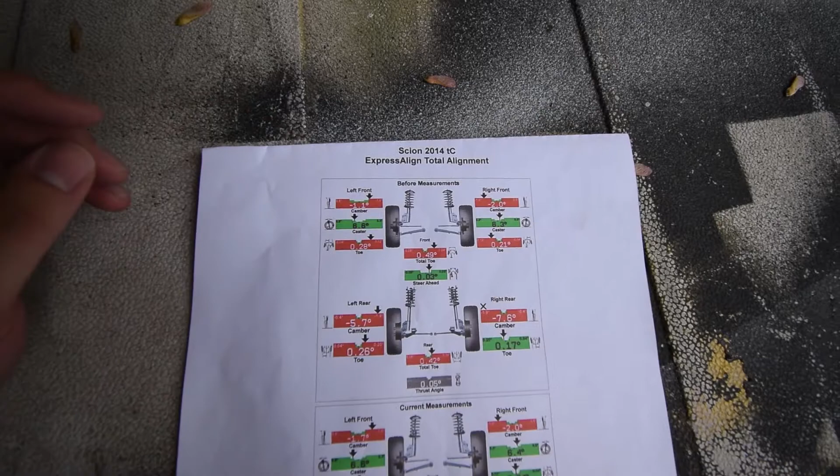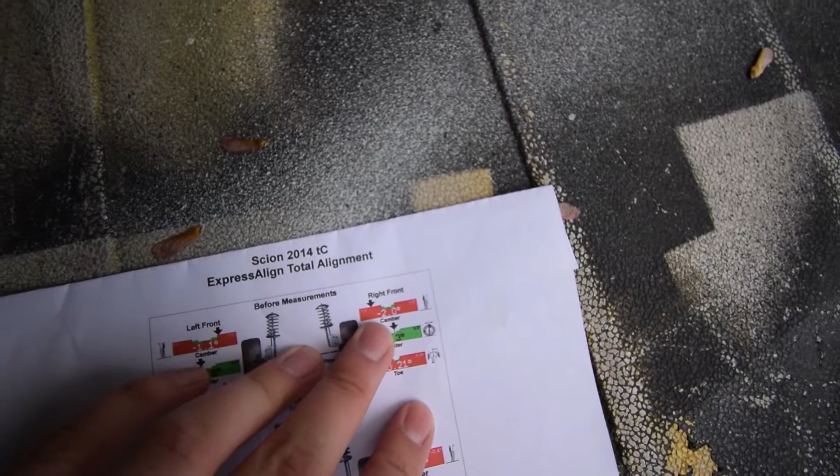So let's flip around to this right here. Those of you who know how to read this, good. I'm just gonna talk about it for those who don't really understand. So in the front, on the driver's side, we had negative 1.1 degrees camber, and on the right side, we had -2. I think the front was higher simply because of the camber bolts. Because I swear that this wheel was straight, not -2. Especially since this one was definitely more cambered in the front, I think putting the camber bolts in there definitely changes it from the -2.

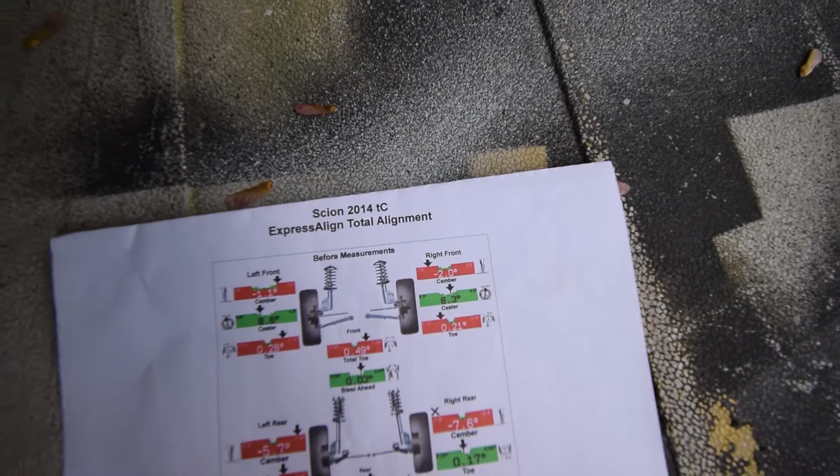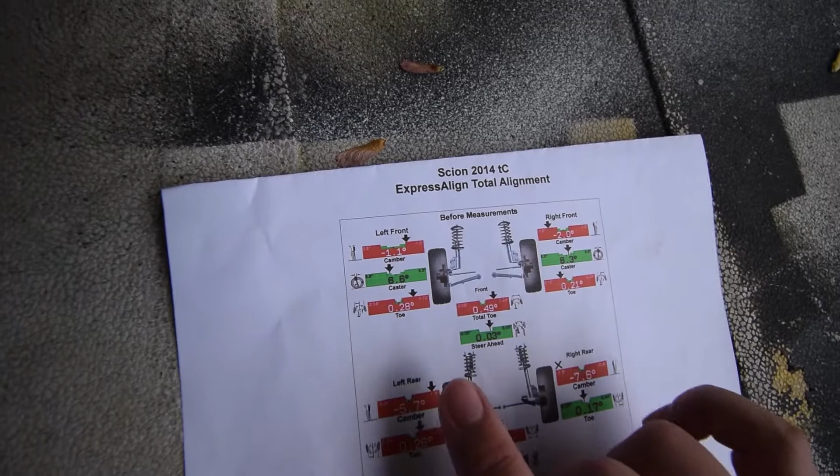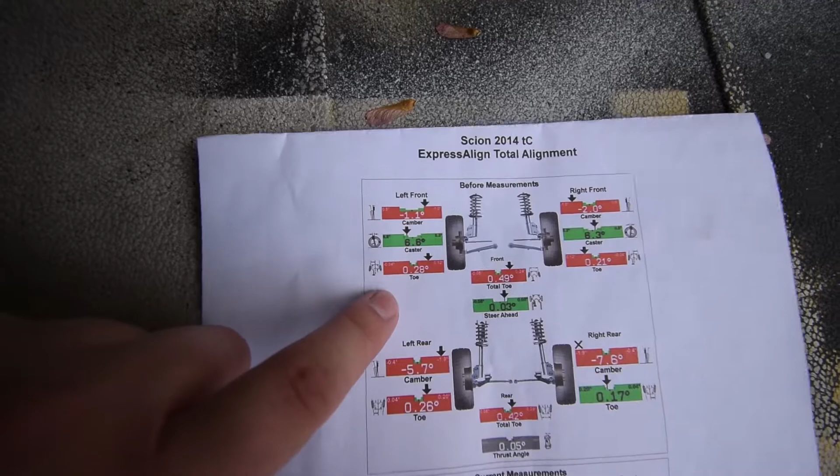So also my toe, I was running about a quarter toe in, right? So I was running a quarter toe in the front. That may have been the reason why I was having so many issues with lower profile tires. Talking with Alex, I actually like the meatiness of the tires up front, so we're probably never going to change that. It's just that might be the reason why I was having so many difficulties up front, because we were running almost a quarter degree in the front.

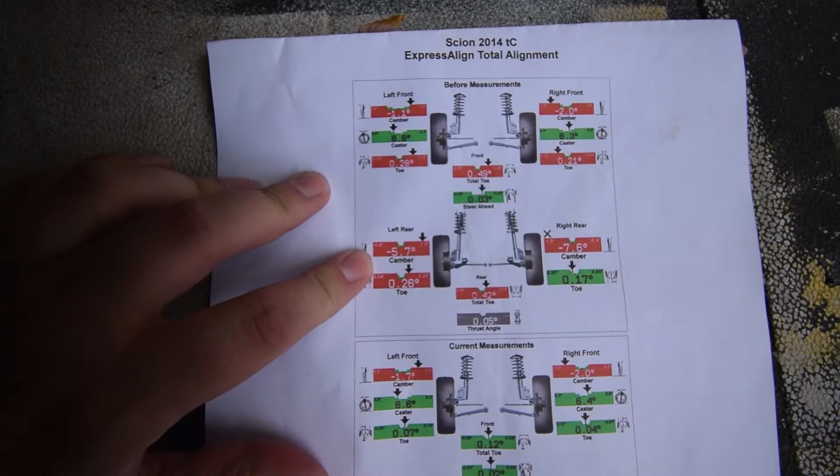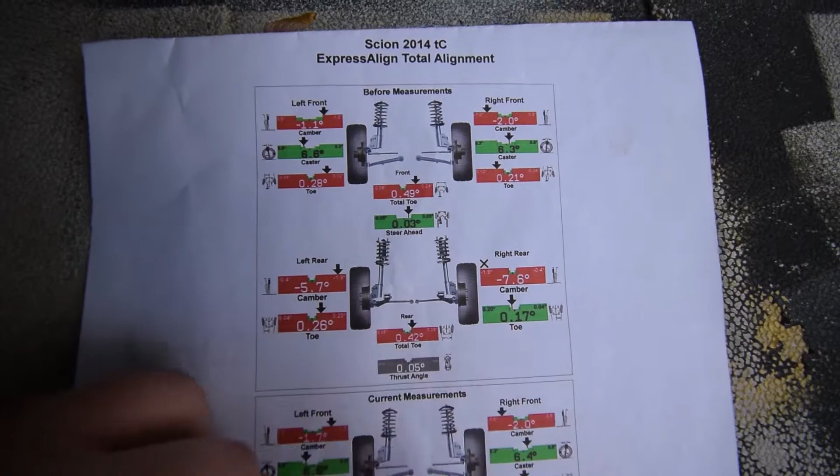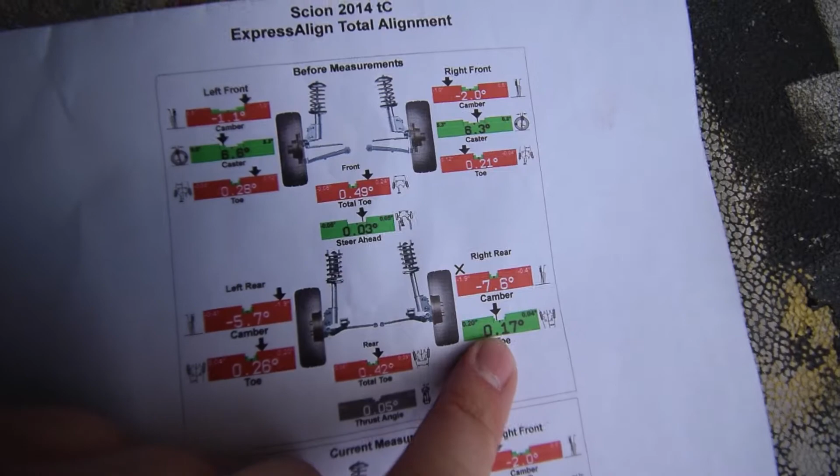So here's where it gets interesting. In the rear, on the driver's side rear, it's negative 5.7 degrees, while on the passenger rear it was negative 7.6 degrees. So we're talking almost 2 degrees off in camber from the driver's side to the passenger side. The passenger side was the only one rubbing. This is the only one that dug into the wheel a little bit, and that could potentially be why I had so many issues with the 30 mil spacer in the rear.

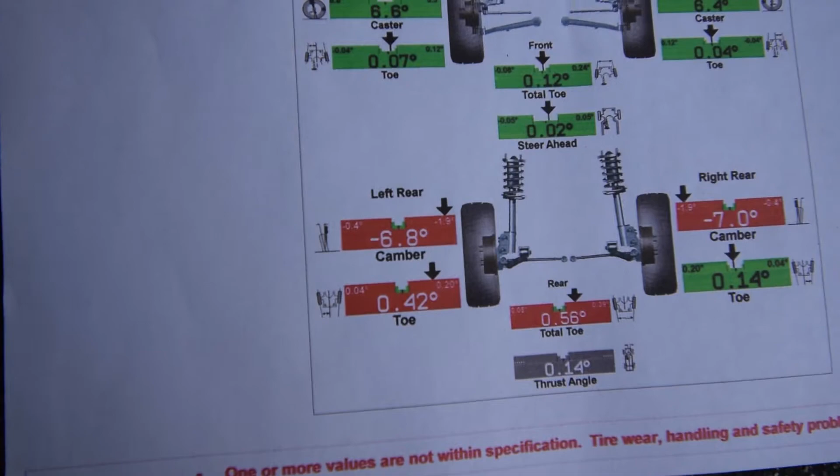So let me show you guys what we did afterwards. The toe in the rear, it is off. It's definitely more off now in the rear, especially in the driver's side rear. That could also be potentially why I'm having so many issues with toe. Unfortunately, I can't get this fixed right now. I might be able to. This might be the main reason why I'm going to have so many issues. We'll see. I'm going to try putting the 30 mil spacer on today, so I just want to talk to you guys about my reasoning for trying this again.

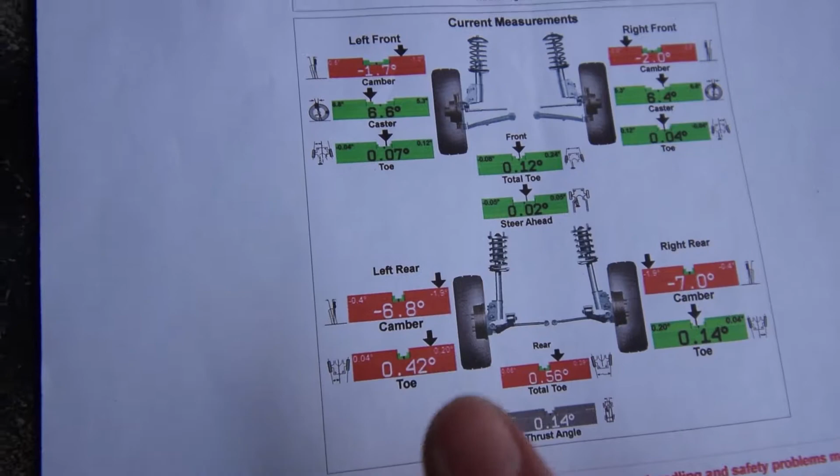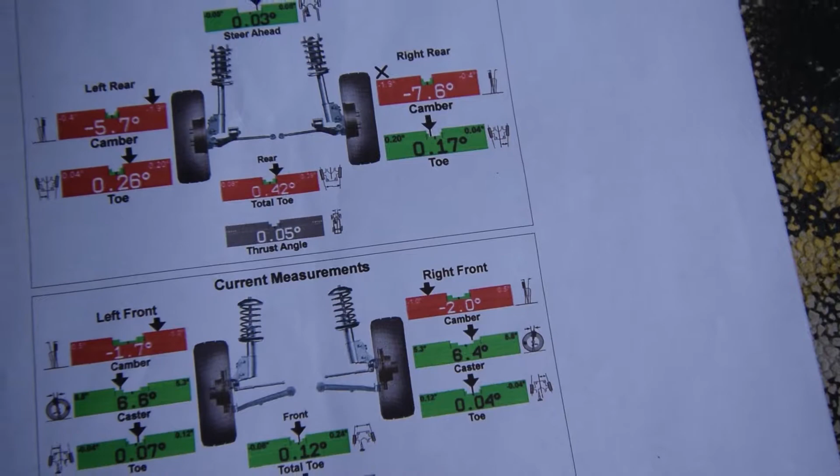The toe in the rear is almost a half a degree in, which is more than what it was before. Now, why it is, it's probably because it was off 2 degrees in camber. So we went from a 5.7 to a 6.8. The other rear was negative 7.6, now it's -7. He tried to make it as even as possible with what he had available in the rear. So this might be actually the biggest cause of the rubbing in the rear, because it's rubbing on the back of the tire, not the front. That might be the reason why I'm having so many issues in the rear, now that I'm thinking about it. So I'm going to try it just to see what happens.

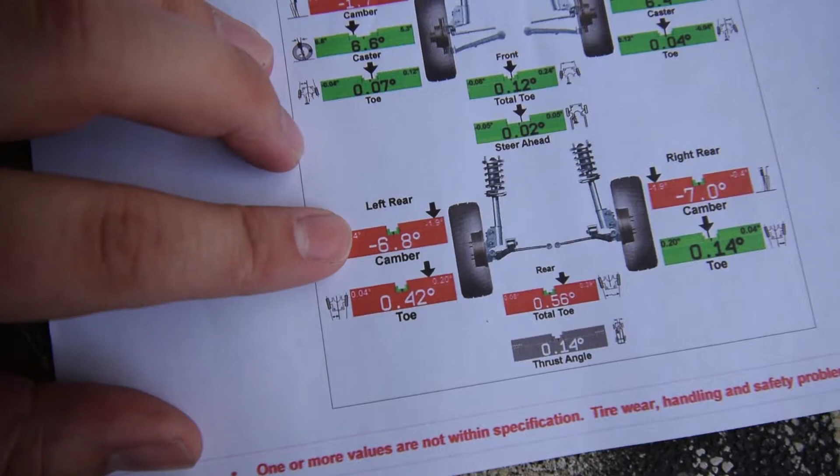Probably drive up and down the road a couple times, see if it rubs. Sorry, let me zoom you guys out. It was very apparent that it was rubbing in the rear. Just driving down the road, it would rub. Just doing this, just doing anything, it would just rub and dig into the tire.

Being that we were able to correct some of the camber in the rear, I'm thinking it might fix that issue. I'm not sure. I'm not a guru about any of this, but just thinking about it and talking it over, it kind of makes sense of why I had so many issues on one side and not so much on the other. But then again, the toe could also be the reason why I had so many issues on one side and not so much on the other.

The reason why we can't fix the toe is the bolt that you need to use to adjust the toe is seized. So when I talked to the guy, he said basically he could fix it, but the bolt would break, and we don't have a bolt right now. So that's probably something that's going to have to be fixed down the line, especially since I am running almost half a toe in now in the rear. Hopefully that is not the reason why, because if it is, then I'm probably going to rub even more.

So, yeah, let me put the 30 mil spacer on. I'm only going to put it on the driver's side rear right now, and kind of drive back and forth in my driveway. I'm not going to put it on the right side. I know it's going to be a little bit weird because it's going to have a 30 mil spacer on one side and not on the other side. But once we put it on the ground, we should definitely see whether or not we're going to have issues. So let me go do that real quick, and once I have it on, I will talk to you guys. All right, be right back.